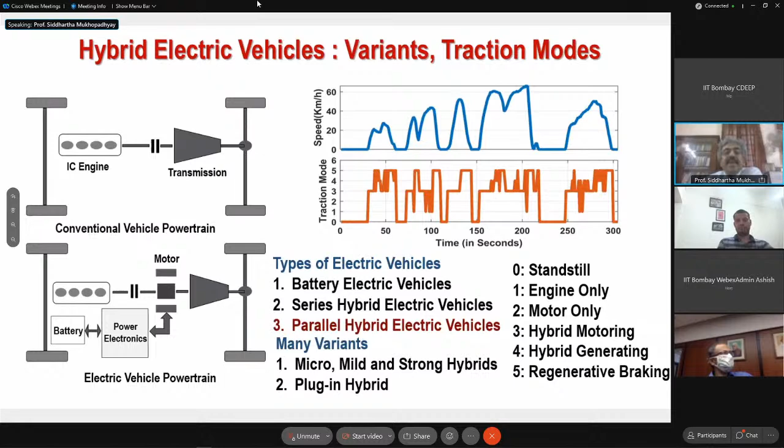If you have a vehicle with a gearbox, then you have 1 degree of freedom because you can choose the gear, and to some extent you can change the torque-speed operating point of the engine itself.

If you have a parallel hybrid, then your degree of freedom is 2, because you can choose the gear, and you can also choose, at any gear position, what is called the torque split ratio - how much torque at that gear you want from the engine and how much from the motor. That is in the hands of the optimizing algorithm, so it has 2 degrees of freedom.

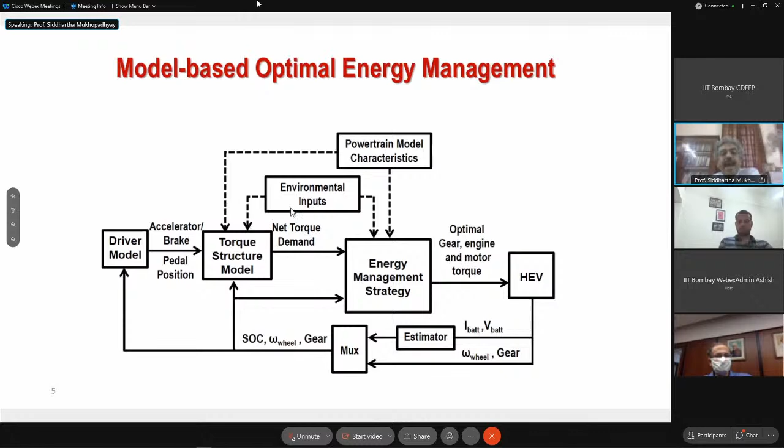But you have further choices. For example, we said the net torque demand has to be met, but the net torque demand itself depends on the aggressiveness of the driver, the traffic, the terrain, and of course the route. So there is a way of optimizing these things further to limit the mechanical energy required to get the vehicle from point A to point B.

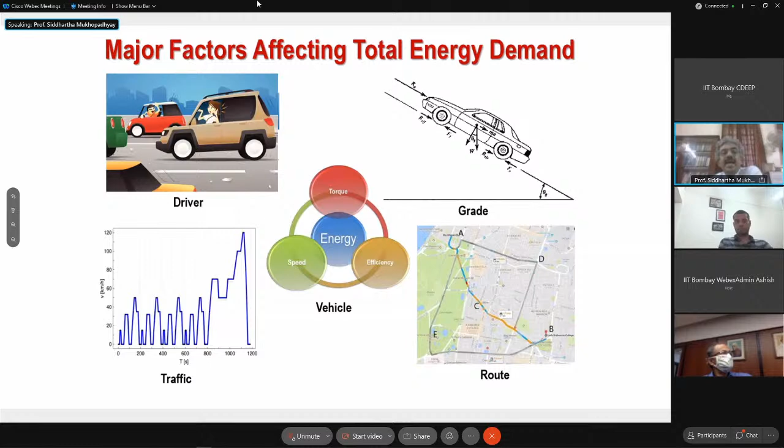If you really wanted to extract the maximum amount of energy efficiency from the overall system, it becomes apparent that you cannot stay in the car. The car - this was the low-level controller we just described, which basically takes signals from whatever is in the car. But you cannot stay in the car.

Because you need to know, if you want to really optimize for a trip, at what velocity and acceleration profiles you are going to move. You need to know what kind of charge replenishment you need to do to the battery, and various other stuff. So you need to aggregate and compute information from a lot of other sources and make a velocity forecast, and use a driver style. You can learn the behavior of the driver, know how the driver drives, know the health and condition of the battery, and what kind of demands will be placed on the battery for the whole route.

And then you have to use a high-level controller which will provide information with which the low-level controllers will work. So it turns out the energy management problem cannot be solved just by staying within the car - that is a very interesting observation. You need various kinds of infrastructure, cloud computing infrastructure, and various kinds of services to be able to give the customer the least cost of actually driving the vehicle. That's the key point I'm trying to make.

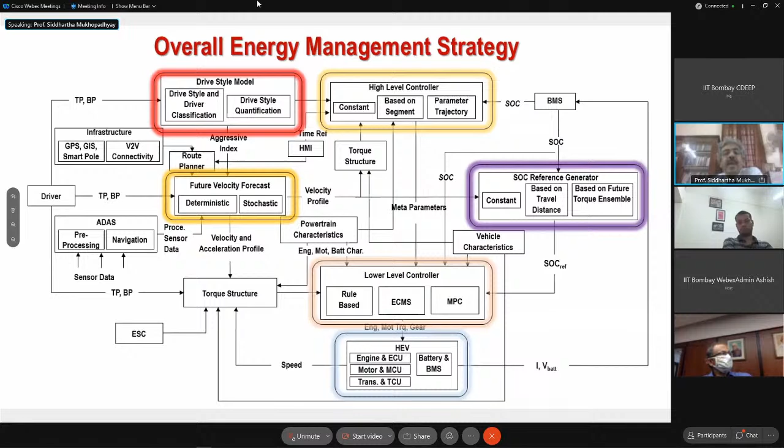So it turns out that the high-level controller has to, once you have specified a route, now we often travel with respect to maps. So when you travel the route, you need to segment the route. Across segments, you can make some assumptions about the traffic, the terrains maybe. So based on traffic, terrains, traffic lights, etc., you can make segments. And then you need to do a high-level optimization to actually decide the charge references which you need to provide to the low-level controller. That becomes very important, because there are some situations that will arise when you need both the engine and the motor to run.

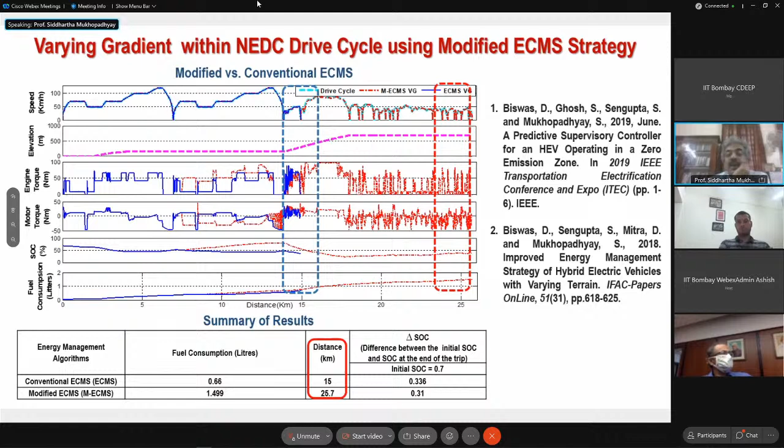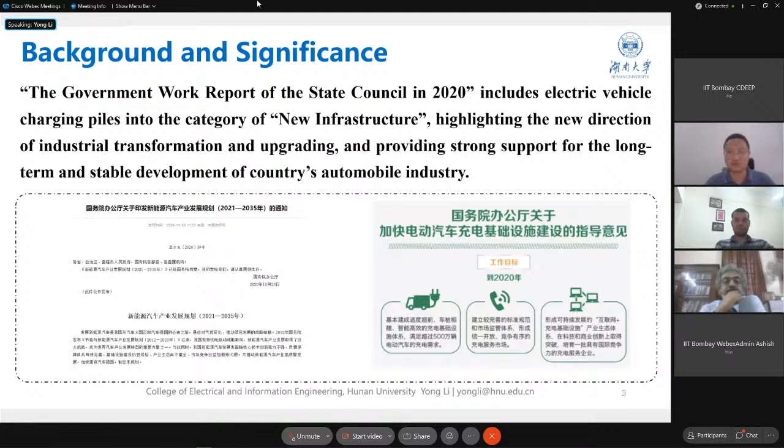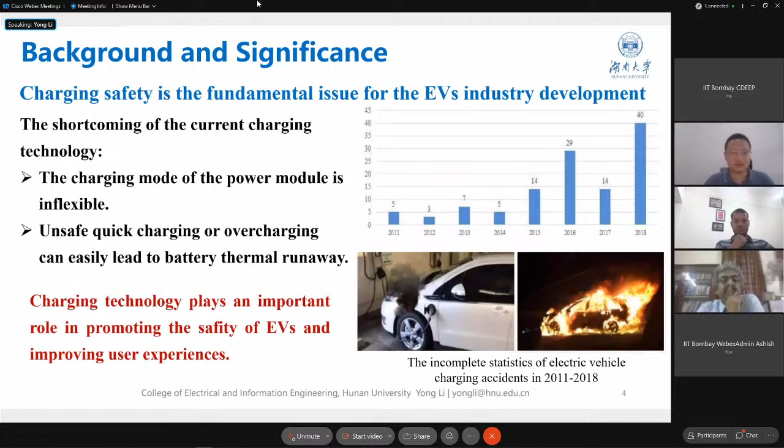Charging safety is a fundamental issue for electric vehicles. But current charging technologies have some limitations, such as the charging mode of the power module being inflexible, and unsafe quick charging or overcharging can easily lead to battery thermal runaway. So the charging technology plays an important role in promoting the safety of EVs and improving user experience.

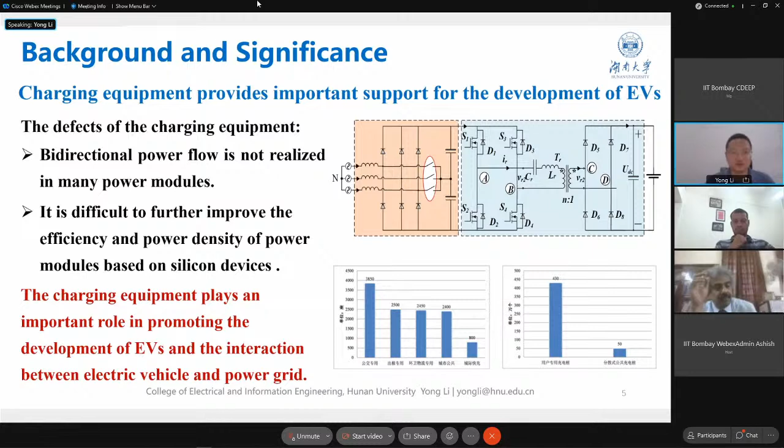However, for the charging equipment, there are some limitations. Bidirectional power flow is not realized in many power modules, and it's difficult to further improve the efficiency and power density of power modules based on silicon devices.

So, considering the mentioned background and significance, our team has performed research from 3 parts. The first is SOC estimation of the iron battery.

For the state of charge estimation, we proposed RNN combined with PSO to improve the accuracy of SOC estimation, with good generalization ability on driving cycle data sets at different temperatures.

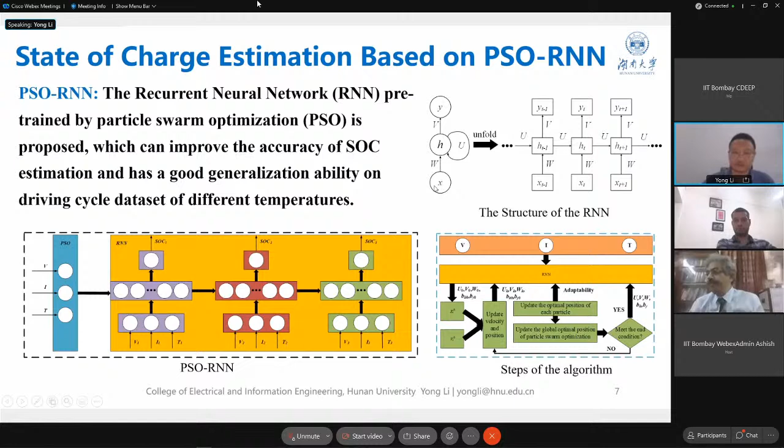This is the structure of the RNN and the PSO-RNN combination, and the flow chart of the algorithm. We did many experiments to validate our estimation algorithm and compared it with current data-driven methods.

The PSO-RNN method can reduce the error within 2%, and the SOC estimation of the proposed method is more robust and accurate. We can see the figures about the SOC error, and these figures indicate the performance of the algorithm.

We also tested our algorithm at different conditions, such as different temperatures and different data sets in different countries, in China and in the USA. In summary, the PSO-RNN method has good robustness at different temperatures.

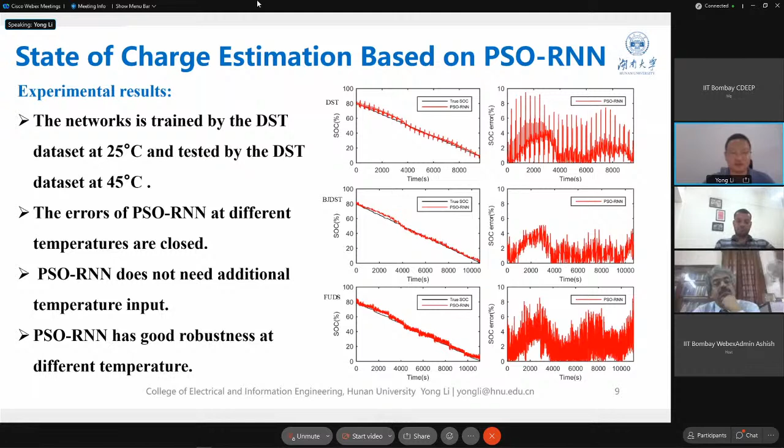The second part, I would like to introduce the charging strategy of lithium battery. Here we investigate the multi-stage constant current charging strategy. For this strategy, it can be segmented by the charging cutoff voltage. We first segment by cutoff voltage and the charging curves, which we can see in the figures here.

Compared to traditional CCCV charging profiles, the MSCC charging profile is more flexible. It can provide a flexible charging process to improve the charging performance.

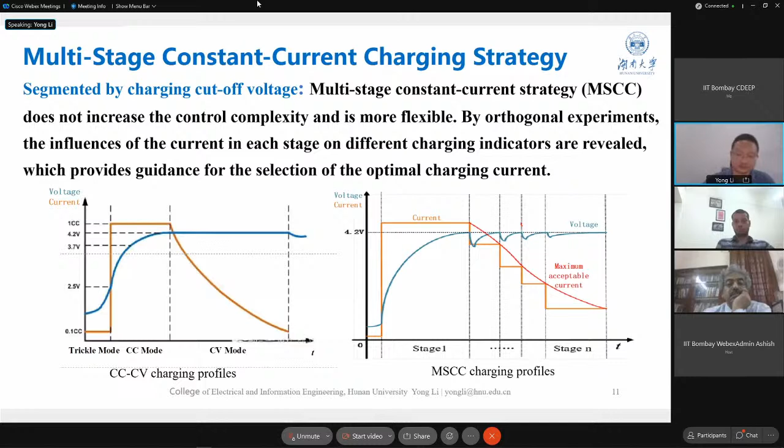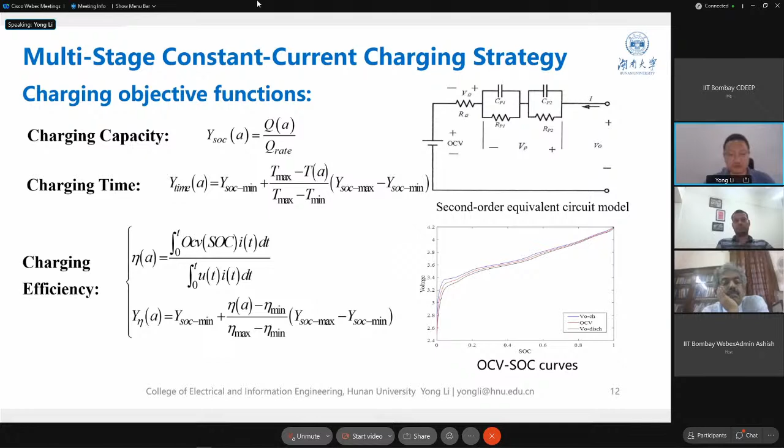We propose some metrics for the charging performance, such as evaluating the charging performance by charging capacity, charging time, and charging efficiency. For the charging current optimization, it's a multi-factor optimization problem for different objectives.

To address the optimization problem, we use the Taguchi method to solve the optimal charging current combination. This method is an experiment-based method, and the core of this method is the orthogonal array under the factor effect evaluation.

We can see from the table that the charging process is divided into 5 segments, and each current contains four levels. We can see the first step orthogonal experimental result, where the charging current in the fifth stage is weighted as a significant factor of the capacity and time.

The second level is the optimal value. The capacity and efficiency are maximized by the charging current in the first stage, where the first level is the optimal value. So here we optimize the charging current at different stages.

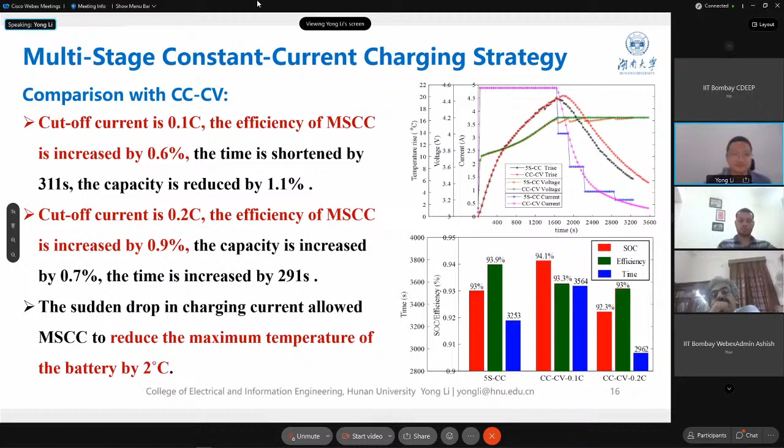Also, we compare the method with the existing CC-CV method.

This is the result. For the time limitation, I don't talk more about this. And this is another aspect to evaluate the charging performance of this strategy.

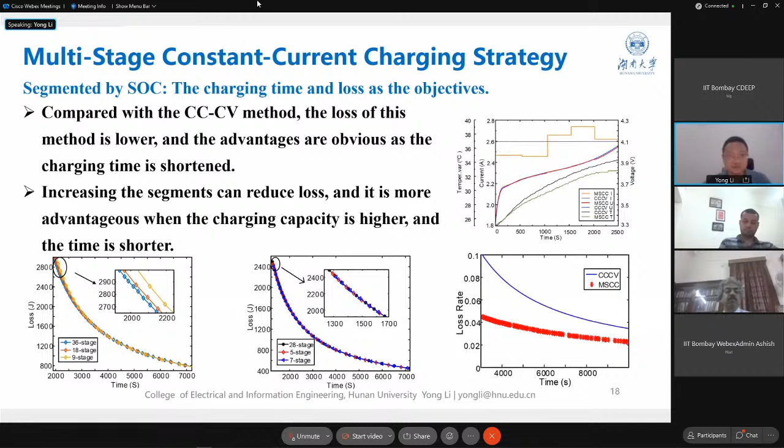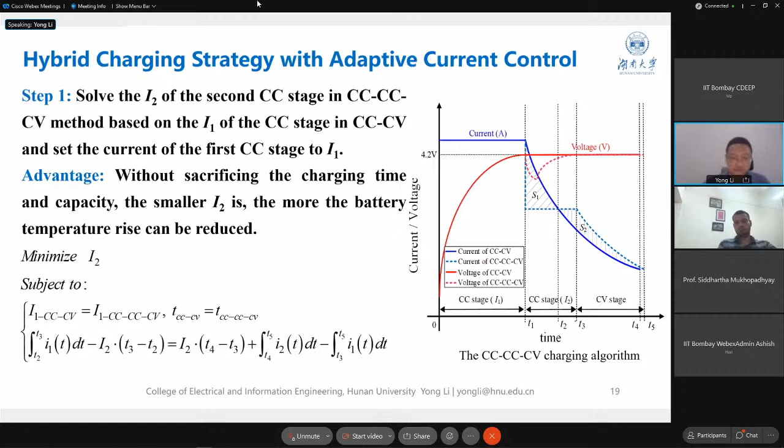For the second step, this is based on the internal resistance of the battery; the current of the first CC stage in the hybrid charging strategy is adaptively controlled. We also established models showing that the adaptive current can significantly reduce the charging loss and reduce the battery temperature rise.

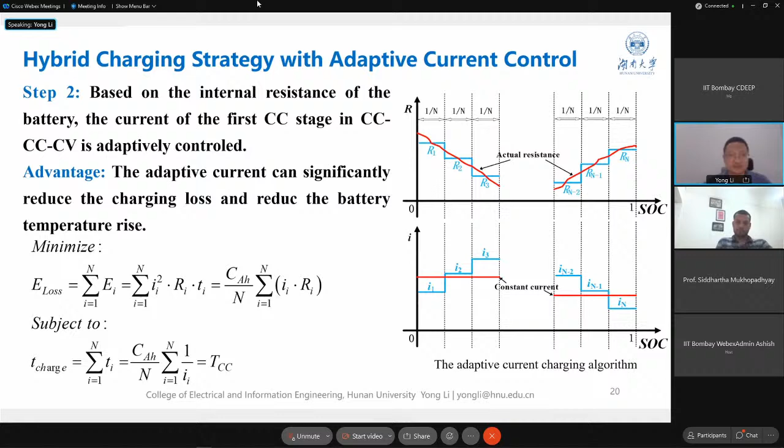Also for the hybrid charging strategy, we performed the HPPC test at different SOC to obtain the internal resistance and the impedance. This is the result.

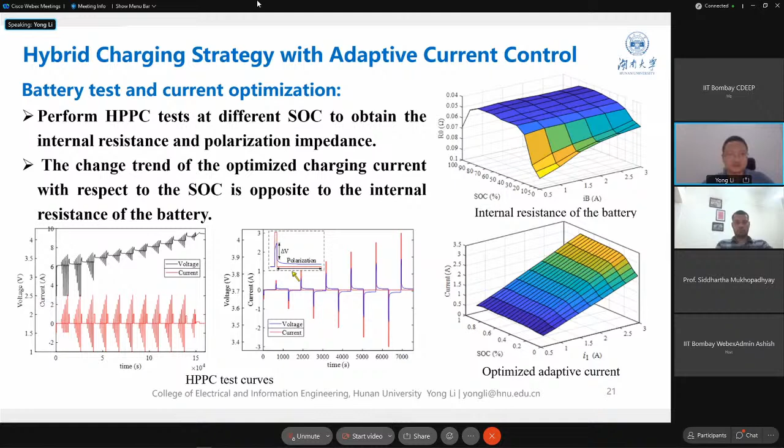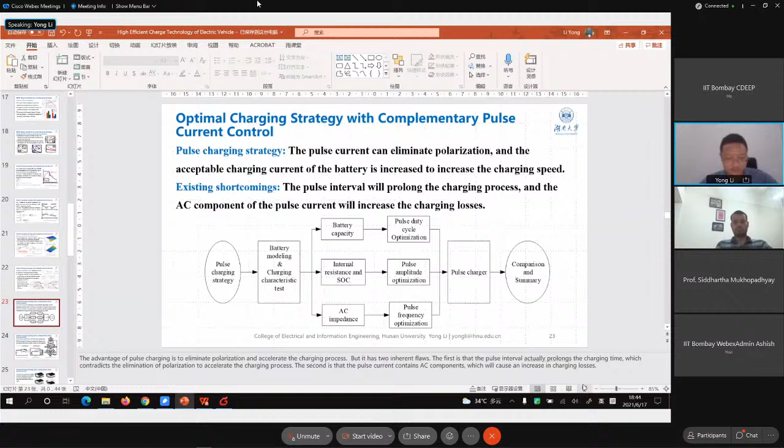optimal charging strategy with complementary pulse current control. When we study the optimal charging strategy, because for pulse charging, the advantage is to eliminate the polarization and accelerate the charging process. But it has two inherent flaws. The first is that

the pulse interval actually prolongs the charging time, which reduces the charging performance. And the second reason is that the pulse current contains an AC component, which will cause an increase in charging loss.

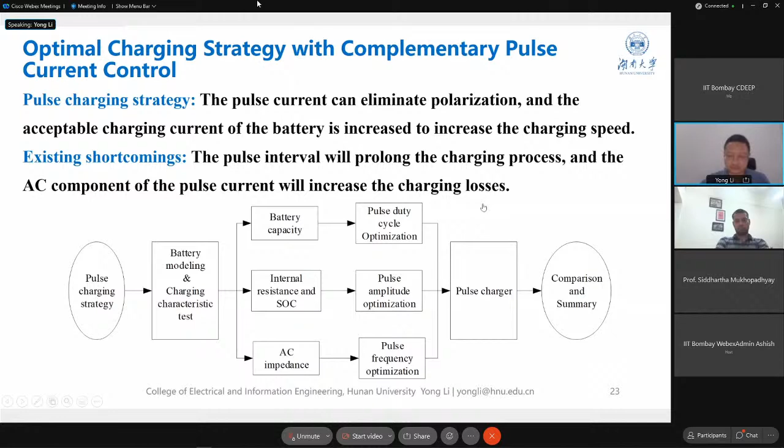So for the optimization of the pulse frequency, the minimal AC impedance frequency is obtained by the AC impedance spectrum test of the battery, which is used as the initial value. We also tried online tracking of the optimal frequency based on the perturbation observation method for frequency tracking here.

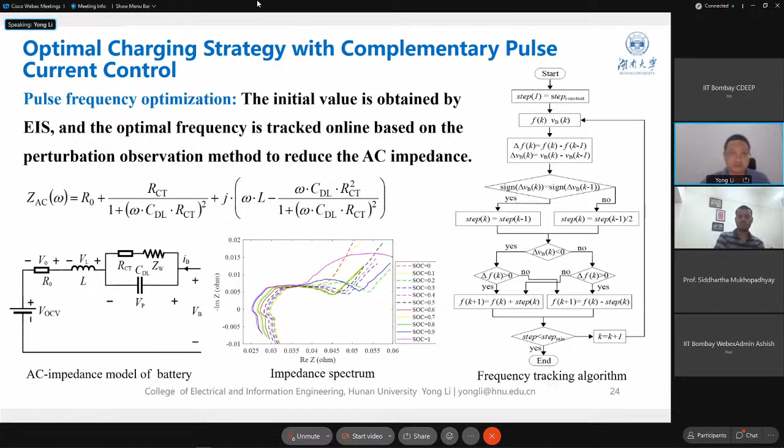For the method of pulse frequency optimization, it's the same as the mentioned hybrid charging strategy. Actually it's also based on the battery's internal resistance characteristics to optimize the charging current and minimize the charging losses.

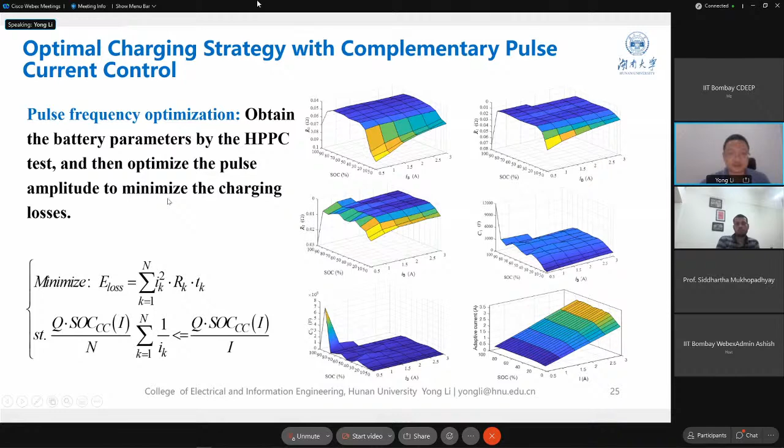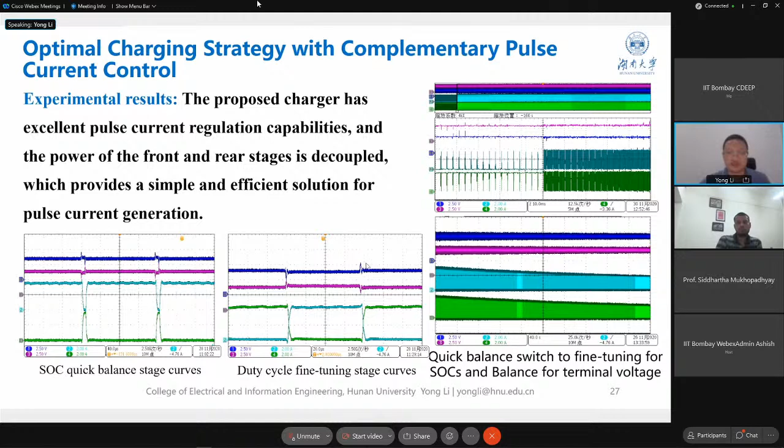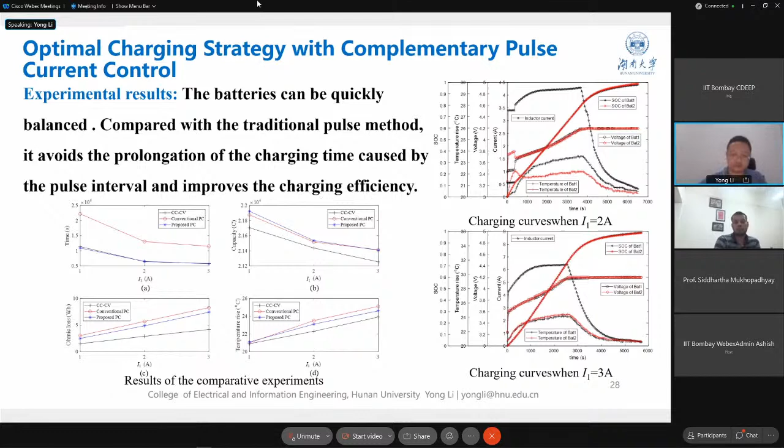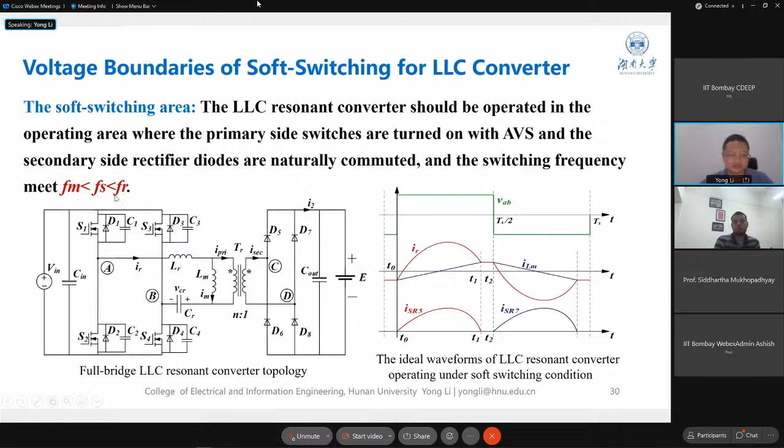And there are two soft switching boundaries of the LLC resonant converter. The ZVS upper voltage boundary corresponds to the maximum output voltage of the converter under the ZVS condition, when the circuit is in the series resonant state of the reactance here.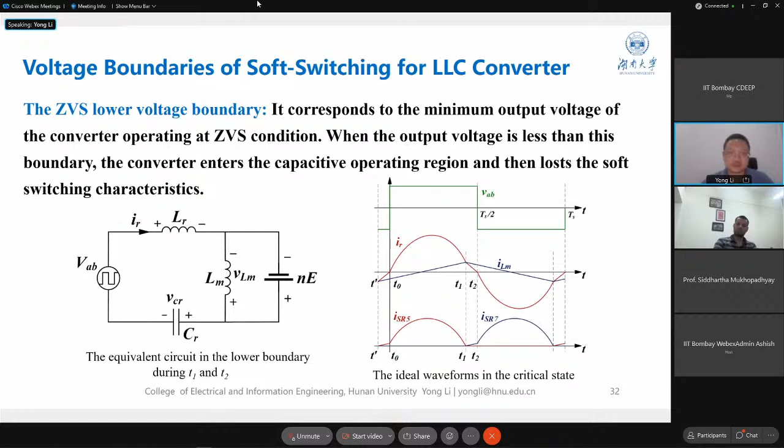In terms of the ZVS lower voltage boundary, it corresponds to the minimal output voltage of the converter under the ZVS condition. This is also the characteristics analysis about the boundary here.

Here we show the process of the calculation and the output voltage at the upper boundary and the lower boundary. We can do some calculation here. We also do the experiment to illustrate the upper and lower boundary for the LLC at the ZVS condition.

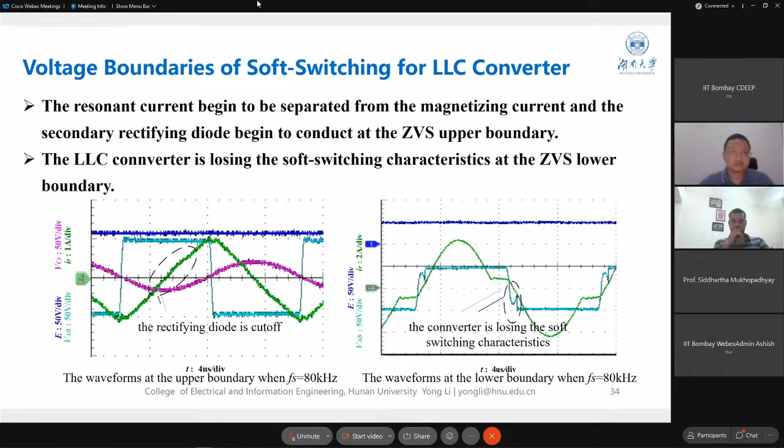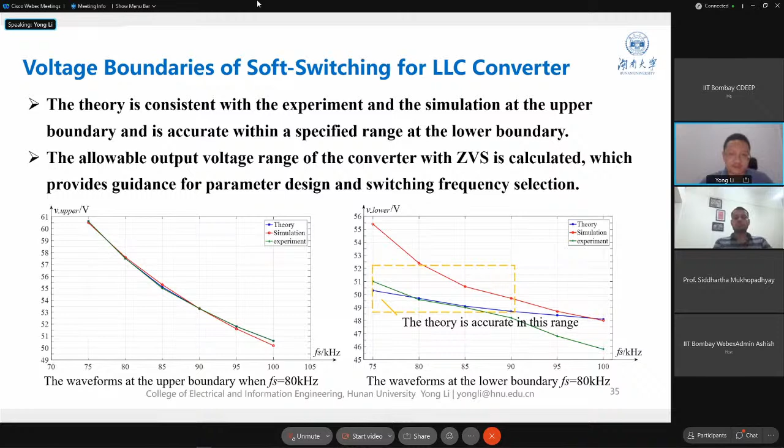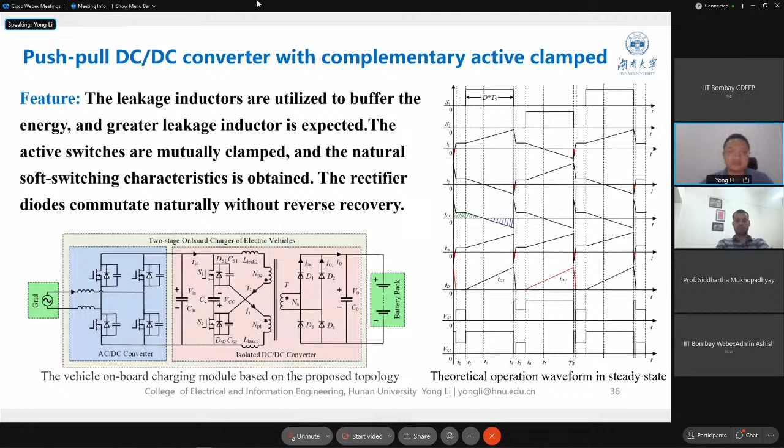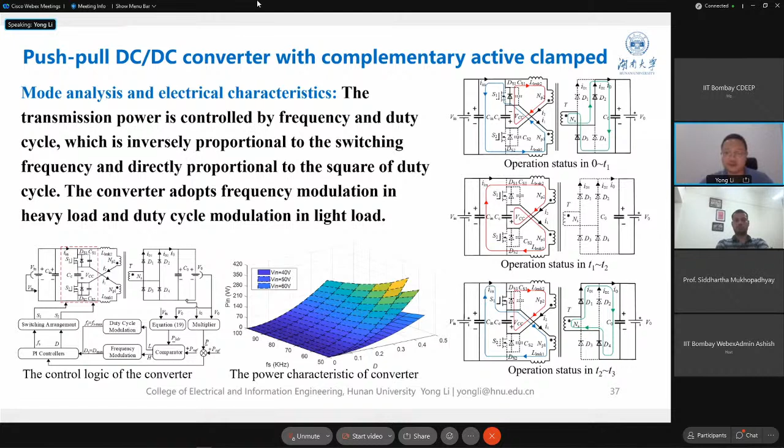So we also do some analysis about the experiment here. And at last, we propose a push-pull DC-DC converter with complementary active clamp to improve the charging performance of the DC charger. We analyze the operating mode for the DC-DC converter at different operating states, and also we obtain some experiment results about this.

In summary, supported by the Key Research and Development Program of Hunan Province, China, we established the platform for charging and discharging tests for lithium batteries. With this battery platform, we can develop battery state monitoring and also test battery parameters.

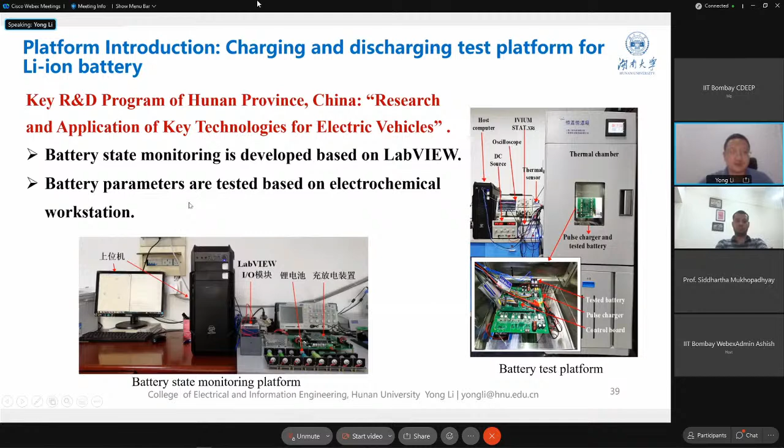We also established the charging module research and development and electrical vehicle charging platform. This is a platform for power electronics research and development. In Hunan University's campus, we established a demonstration charging station. Actually, this is a PV storage charging microgrid with smart building, used for this demonstration project.

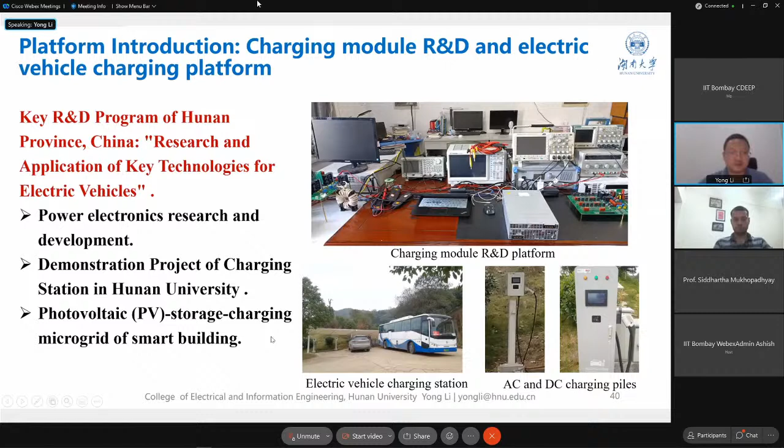For the conclusion, we focus on high efficiency charging technology for electric vehicles and carry out research in the fields of state of charge estimation, battery charging strategies, and charging converters. Various charging strategies are proposed and improved to increase charging flexibility and improve charging performance.

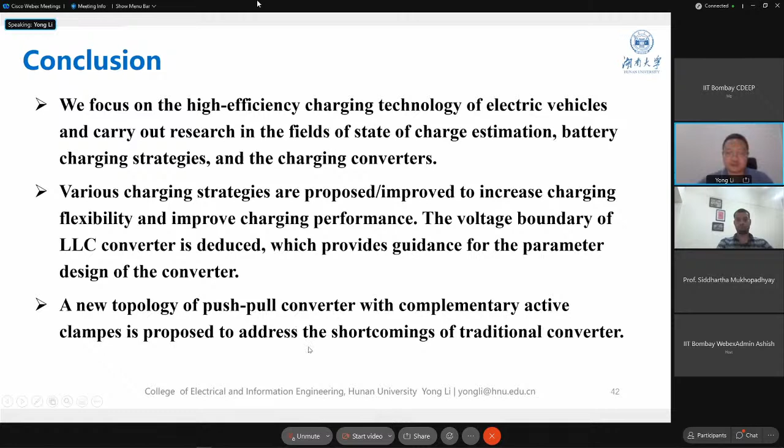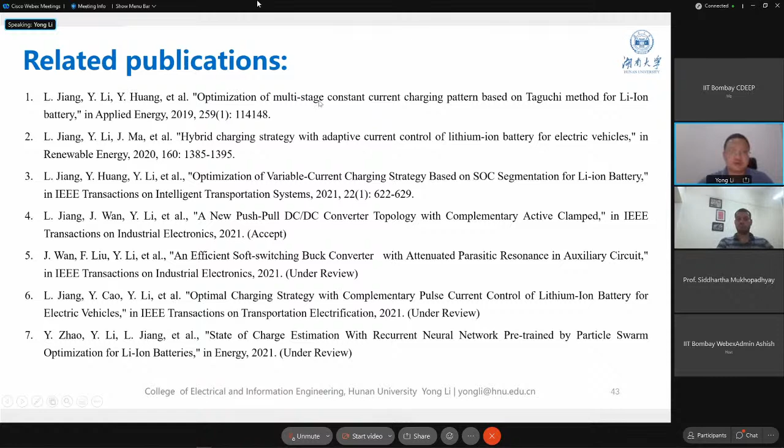We proposed a new topology of push-pull converter to address the shortcomings of traditional converters. This is related publications for the presentation. Okay, thank you for your attention.

So, any questions? Thank you, Professor Li. I think there is one question in the chat box, I'll read it for you: for SOC estimation, what kind of current profiles were used?

Okay, I will say here. For the SOC estimation, we use the dynamic stress test. We consider, actually this is a data-driven method, so we consider different temperatures, and also use the benchmark data set for the SOC data for this method, such as the driving cycle data set at different temperatures.

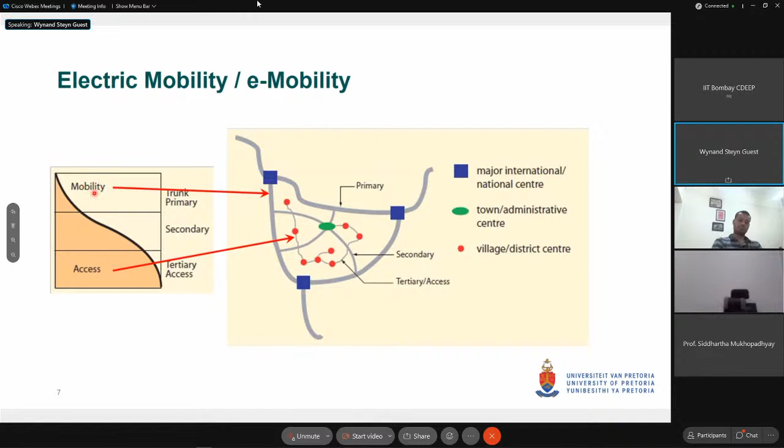Electric mobility or e-mobility is obviously focusing on the whole electric powertrain technologies, which a lot of focus is on. But very importantly, also in-vehicle information and communication technologies and connected infrastructure. These aspects, from a road pavement engineer viewpoint, are sometimes more important to focus on, because this is where we take these electric, hybrid, hydrogen fuel cell vehicles with very specific reasons, and we see how they connect to our infrastructure, or how we use data and information from them to support and improve the infrastructure we're working with.

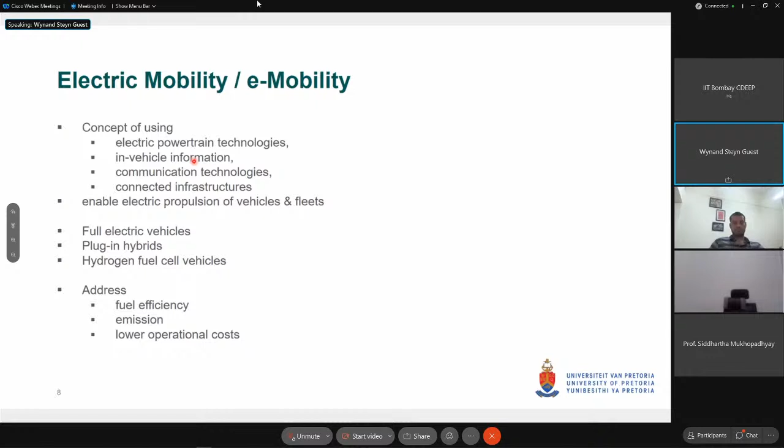Another aspect to think about is the digital divide, which indicates, in terms of the digital economy, where the gaps are in the world. Nielsen defined this as three stages: the economic part, where data is just too expensive; the usability part, where there's access to data but it's too complicated for the user; and then empowerment, an interesting one, where the available digital technologies are not used to their optimum. So too simple usage - you don't realize the power of the computer you've got, so you just do basic typing on it. Various types of digital divides that we've heard about.

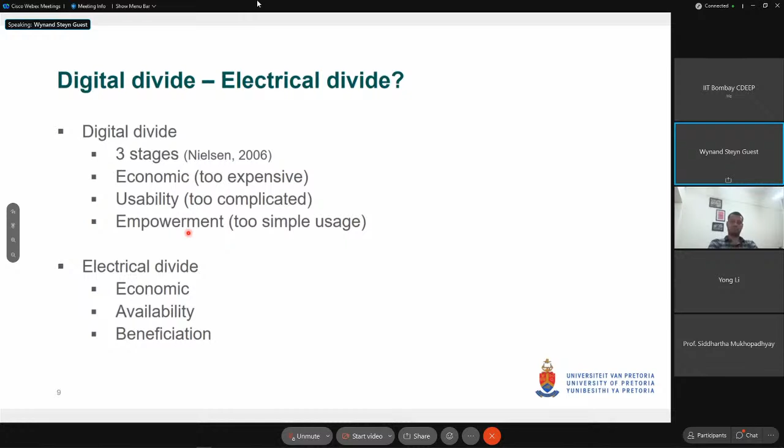But similar to this, we can also look at the electrical divide. The electrical divide partly looks at the economic part, where it's too expensive to obtain electricity; the availability part, where there's purely no electricity available; and then the beneficiation part - what do you do with this electricity when you've got it available? Are you only lighting a light? Charging a vehicle? Charging a cell phone? What is the beneficiation of this electricity? Because it's wonderful to have electricity, but if it's just in a wire and you don't use it to beneficiate and support the community, then it's really not of much use.

Now, I indicated in the title that the talk also has a bit of a transdisciplinary context. It's quite important for me, when we talk about something like e-mobility or e-transportation, that we also ask how does it affect communities, how does it affect the people who are using the transportation. So an example I'd like to share is transportation and food mobility.

E-transportation, e-mobility, and food mobility. A very important question is to look at where food is produced and where it is consumed, because between production and consumption, we need some kind of transportation. In terms of transdisciplinary research strategy, we cross disciplinary boundaries to enable a holistic approach, so that we don't provide e-transportation in an area where there's not electricity or not a need, or the need is different than what we think.

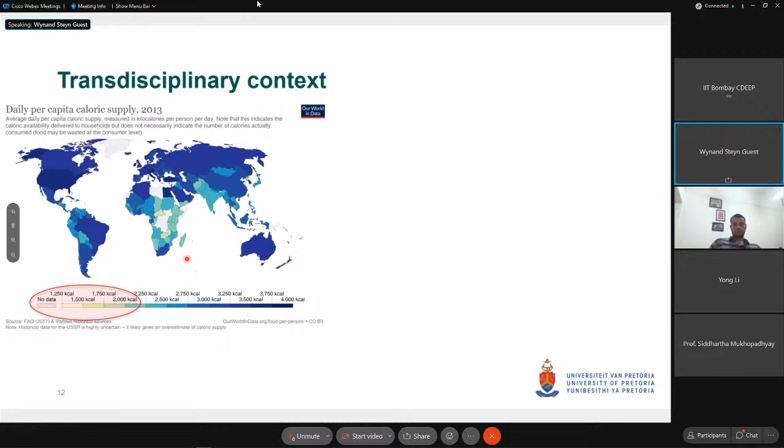So in this context, if we look at the daily per capita caloric supply in terms of food supply in the world, we can see from very low calories to very high calories, there are differences across the world. Food scientists tell us that an average person needs between 2,000 and 2,500 kilocalories per day, and we can see that there are many places in the world where there are shortages in the production of caloric supply.

But why do we need to look at food? If we look at the daily caloric supply of various countries and compare that to the gross domestic product of those countries, there is a positive relationship between them. There are many other aspects and factors I'm not including in the discussion now, but you don't need to be a major scientist to see there is a strong relationship between caloric supply and the GDP of a country, which obviously includes various other economic aspects.

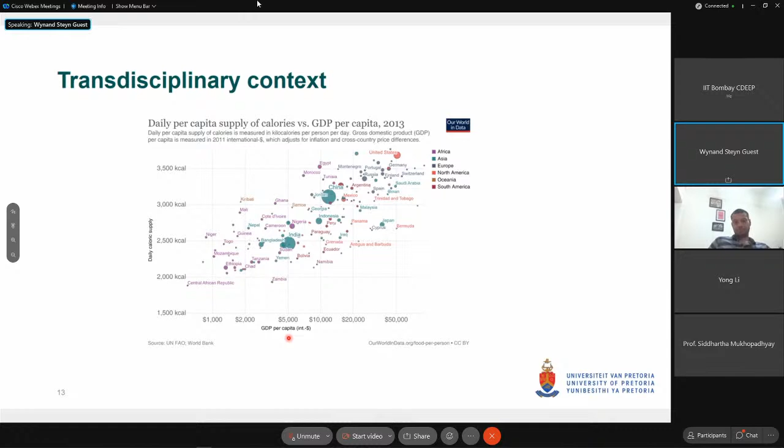So getting food, transporting it from the source to the point of use, is quite important. One example I'd like to highlight links to food transportation, e-transportation, and the bigger issue of electronic data from the whole transportation process. This is something we've done at our Engineering 4.0 facility for a number of years, and quite recently with the development of smart avocados and smart tomatoes - devices that collect data on the experience during transportation between the source and the market, focusing on the effect of the transportation system, accessibility, and mobility on food quality.

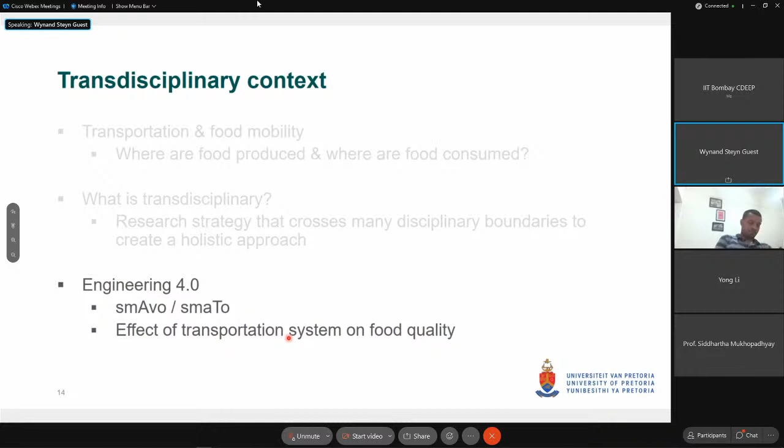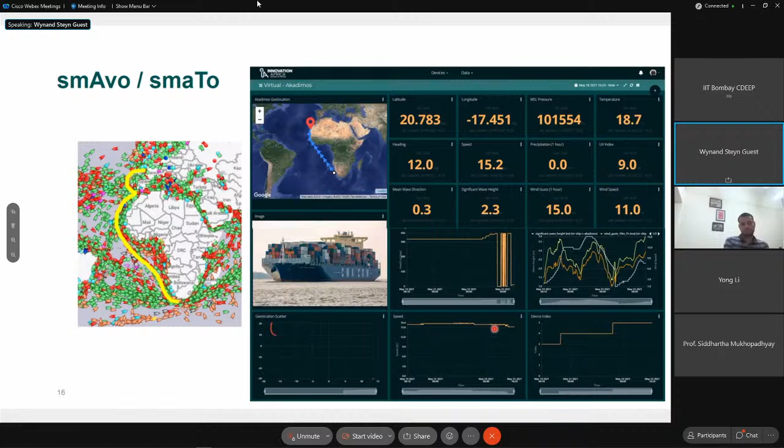This is the last part of that process, linking to international transportation, where some of those smart avocados were followed on a trip from Cape Town at the southern point of Africa - this was halfway through - all the way to Rotterdam in the Netherlands. The same idea applies in this big transportation picture, where a lot of food and supplies are being transported. Each of these little icons is a ship at that stage on the sea. What is the effect of transportation conditions on this transport? Are there aspects where we are losing quality, losing the benefit of the food, where the whole e-transportation system drops us?

The last focus for me is to look at the UN SDG links, our sustainable development goals. We all know about the 17 sustainable development goals, and some may be very appropriate to what we are doing in e-transportation, while others may not be as related. But if you match transportation with the sustainable development goals, you can see a major number of them, looking at hunger, poverty, clean energy, economic growth, infrastructure, communities, life on land, and so on, where there is a very strong link between transportation and sustainability. In my mind, the move towards e-transportation is quite important in this regard.

Then synthesis and way forward. I think e-mobility is a fact of life. We cannot get away from that. Electric vehicles have urban and rural applications, and changes in behavior are expected in this regard. We need to think about the issues around it, such as where to get the electricity, the E in e-mobility, how to distribute this electricity, and how to design for the E part, the electricity part, in our system. Should we change the design of our road networks, of our infrastructure, of our road furniture, or how do we cater for this in a bigger environment?

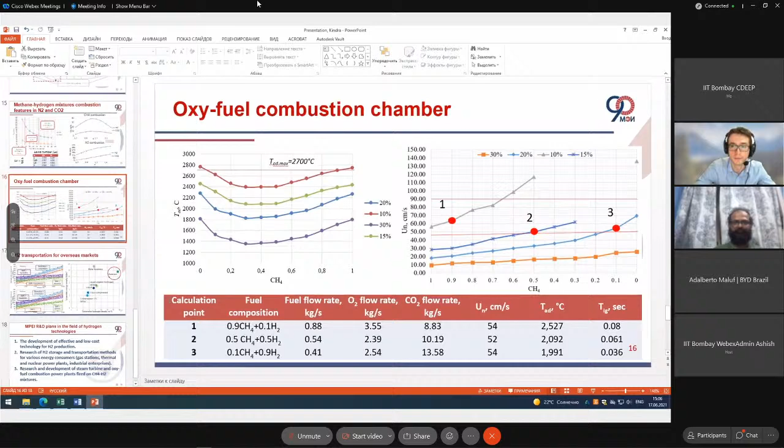The subject of my report will be the research and development of promising hydrogen technologies. Today, the hydrogen topic is very hot, and many countries are trying to find ways to develop new, perspective technologies in the energy and transportation sectors. My talk will have the following structure: I want to start with the relevance of the transition to a hydrogen economy in Russia, then give a brief description of the hydrogen concept.

After that, I want to talk about different power generation technologies, such as steam turbine power plants with hydrogen overheating, nuclear power plants with the same overheating, combined cycle gas turbines with hydrogen methane mixtures, and the last technology, oxy-fuel combustion power cycles with hydrogen methane mixtures.

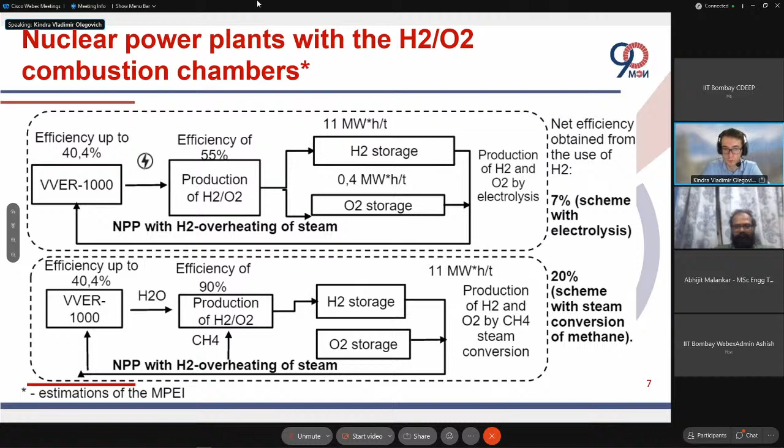This solution allows us to decrease investment for the thermal power plant because we could eliminate high consumption of heat-resistant alloys, which are used for boilers and steam pipelines, because the combustion chamber is usually located before the steam turbines and very close to it. So the efficiency of such a power plant would rise up to 45% if we have an initial steam temperature of 840 Celsius degrees.

However, there are some problems which could occur with that scheme, that technology. It's connected with the efficiency of the combustion process in such combustion chambers, because the pressure is very high and there's a lot of dilutant, steam dilutant, which also affects the combustion process.

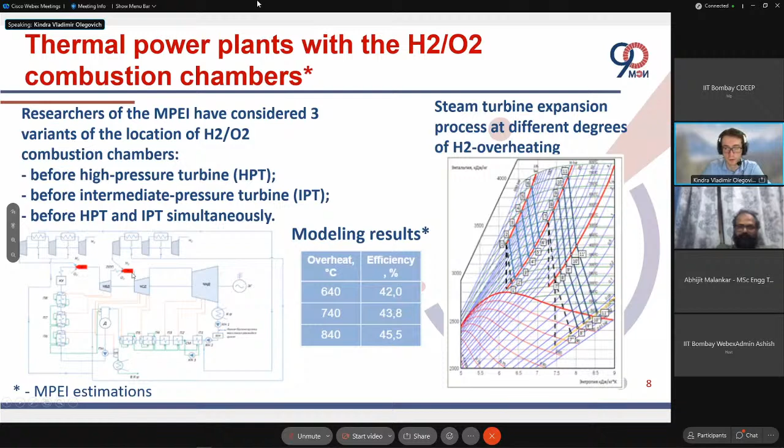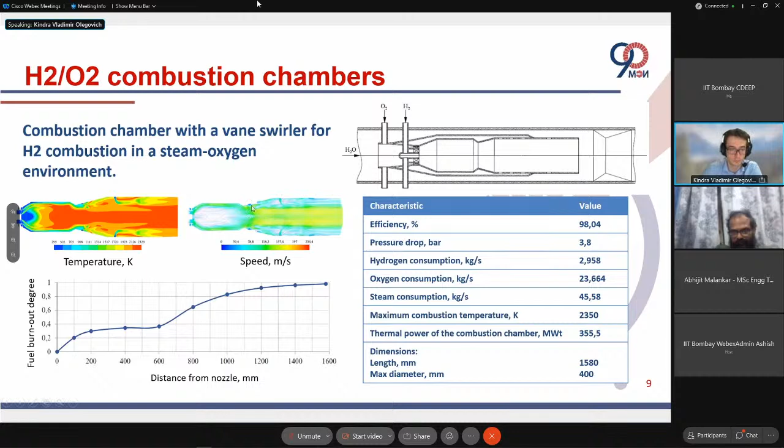The efficiency of such a combustion chamber is not very high, it's only 98%, so 2% of hydrogen will not burn. It's still a problem for us, and the reason is that we should burn hydrogen in near stoichiometric proportion of fuel and oxidizer.

The second problem we considered was increasing flow capacity in the low pressure turbine. To increase the flow capacity of the biggest part of the steam turbine, we could use the traditional method of increasing blade length, but we are limited because of strength problems.

The possible way to deal with it is creation of a two-tier low-pressure turbine with a special penultimate stage which has a blade with a fork shape. It's very unusual, and this blade was created at Moscow Power Engineering Institute. Such a low-pressure turbine would have the same blade length as a traditional one, but capacity would be increased by 40%, which is quite significant and could solve the problem of increasing flow in the low-pressure turbine.

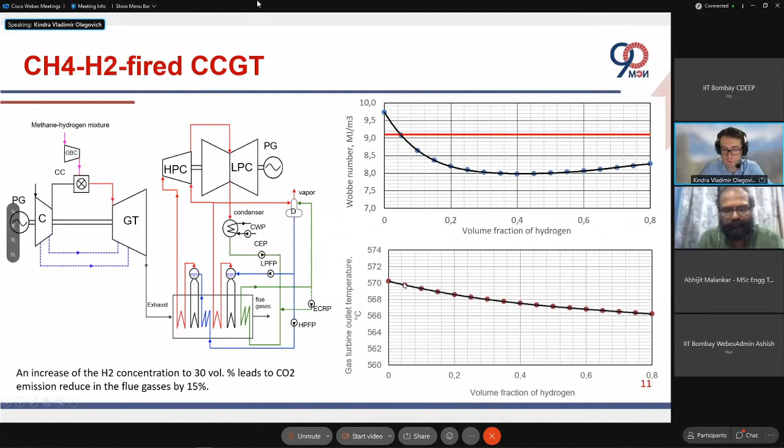The second technology we considered is the usage of methane-hydrogen mixtures in combined cycle gas turbine power plants. When we mix hydrogen with methane, we change the parameters in the cycle. The gas turbine outlet temperature will not decrease significantly, and efficiency also will not decrease significantly. Power will decrease by 1%, but efficiency will not. The reason is the increased content of water steam in the flue gases.

We also investigated the process of combustion, the results of which I'll show later. The last technology for electricity production, and one of the most promising, is oxy-fuel.

We also added a unit for ammonia production. Ammonia is necessary for transportation of hydrogen - it's a very cheap way for transportation of hydrogen over big distances. This unit is integrated using nitrogen produced by the air separation unit. Here you can see this link. After production, we could also transport some ammonia, and some hydrogen would be burned in the oxy combustion chamber.

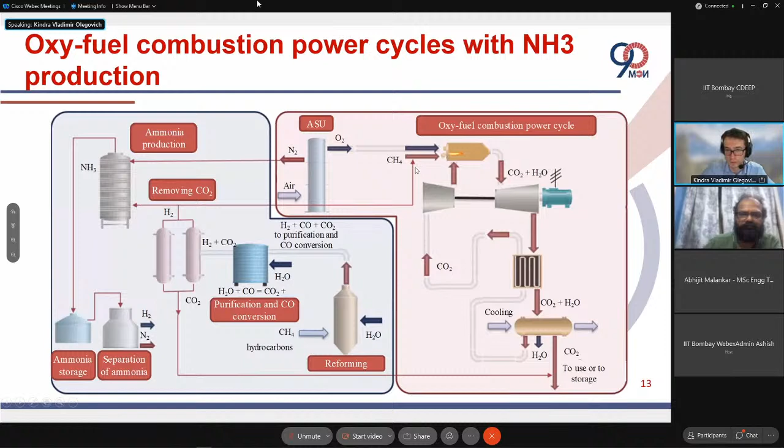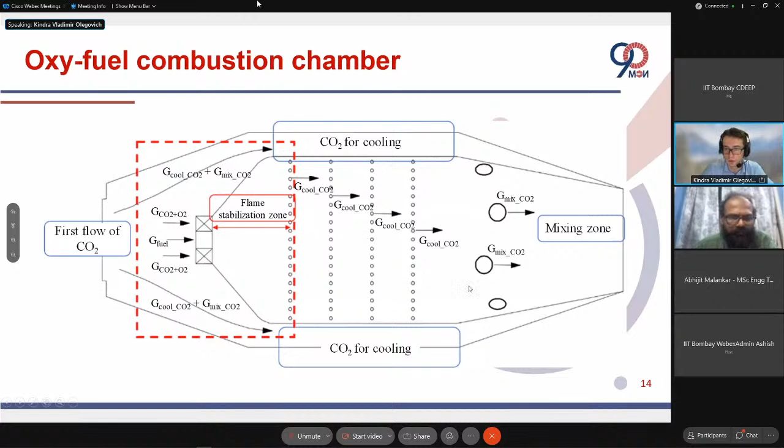Here on the slide you can see this kind of combustion chamber which could be used for oxy-fuel combustion. It has several zones: flame stabilization zone, cooling zone, and mixing zone. It's quite traditional, but the results of investigation are not very traditional for that combustion chamber.

When we model the oxy-fuel combustion, we found that it's well known that hydrogen has a high flame propagation speed, but the carbon dioxide, which is the diluent in oxy-fuel combustion, reduces significantly the speed of propagation. If we compare combustion in nitrogen-diluted versus carbon dioxide-diluted conditions, the propagation speed of hydrogen will be much lower in the carbon dioxide.

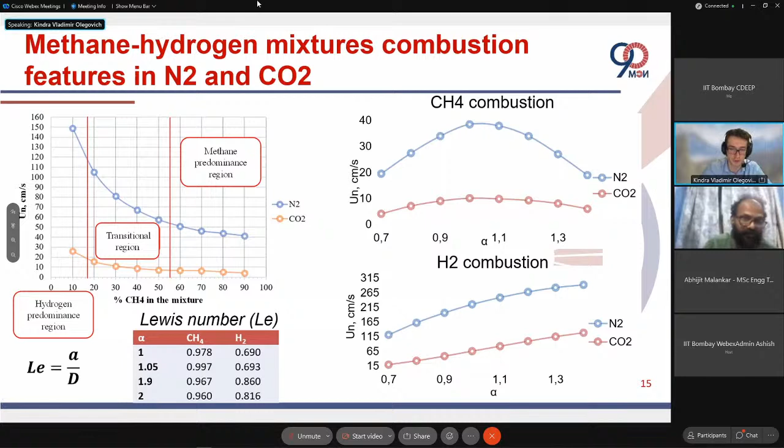However, hydrogen has a bigger flame propagation. So if we compare oxy-fuel combustion chambers with traditional gas turbine combustion chambers, this flame propagation will be near the same.

After considering the technology for hydrogen production and usage, we also wanted to investigate the possible ways of transportation. We considered well-known ways like compression of hydrogen, liquefaction of hydrogen, and also the ammonia method. We found that if the distance is higher than 2,500 or 3,000 kilometers, the ammonia way of transportation is the cheapest.

It's one of the cheapest ways. Also, the storage of hydrogen in ammonia is quite competitive compared to others. That's why we use this method in the oxy-fuel combustion power cycle.

In the end, I want to say that in the future, Moscow Power Engineering Institute plans to increase our investigation in the field of hydrogen technologies. We have already created a new institution for hydrogen investigation. I've shown you only a small part of the results we have already achieved.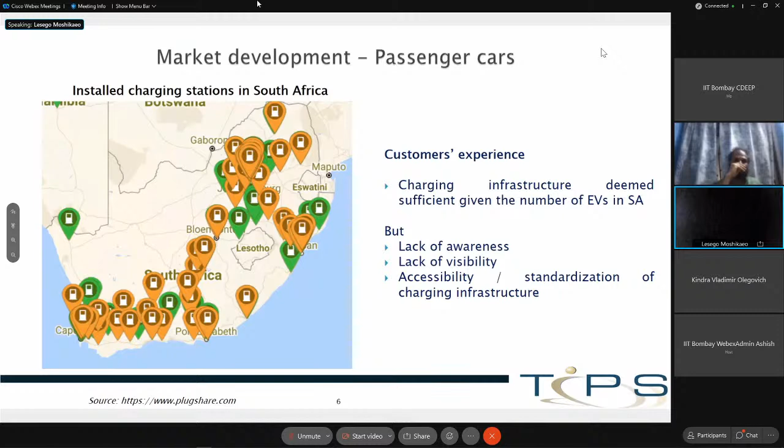But in South Africa we also have issues of blackouts and electricity prices increasing. When it comes to developing electric vehicles in the country, those are concerns, because if you buy electric vehicles and there are blackouts, it'll be very difficult for people to want to partake in this revolution—if you buy an electric vehicle, it'll be very difficult to actually charge the vehicle as a result of the blackouts we have in the country. So those are very valid and key concerns that most potential customers have with regards to passenger cars.

So in terms of policy, we've identified four key areas for primary intervention. The first option would be for the country to change its value-added tax, or ad valorem, and we see this as being impactful. However, the question would be how do we justify it, because in essence it would seem as if we are subsidizing the rich, which could be very difficult to justify, since we're talking about luxury vehicles.

Especially in the case of South Africa, because we don't really have cheap electric vehicles like your China, for example. The second option would be to look at custom duties and provide a level playing field that addresses an anomaly we have in South Africa: importing full battery electric vehicles from Europe attracts an 18% import tariff, whereas BEVs from any other country attract a 25% tariff. So we see this as very important for policy, to level that playing field and address the anomaly.

But also there's no guarantee of reduced prices for customers if that was to happen. Another option would be preferential finance, done by partnering with financial institutions and hopefully providing cheaper credit for households. But again, the problem is that could be regressive, because it could be seen as providing cheap credit for rich income households, which would again be difficult to justify in a very unequal society like South Africa.

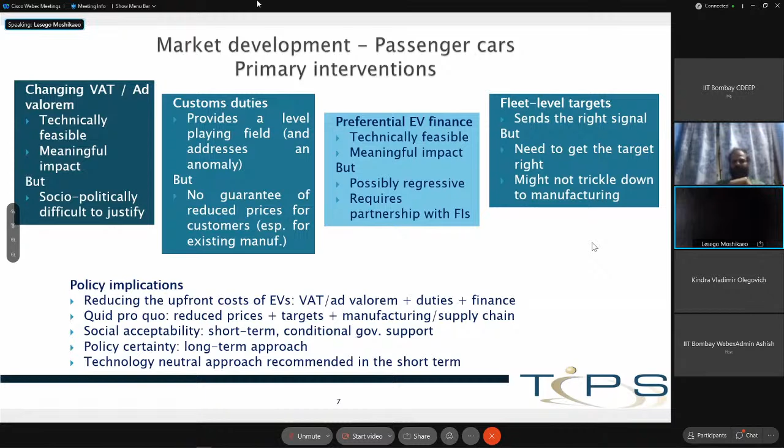As an addition to the primary interventions I spoke about, we also have what we call complementary additions that go with them. These are not beneficial by themselves, but they are complementary. So in order to reduce the price differential gap between EVs and ICE vehicles, we could look at things like reducing license costs for EVs, having preferential insurance rates, or increasing or offering free parking for EVs.

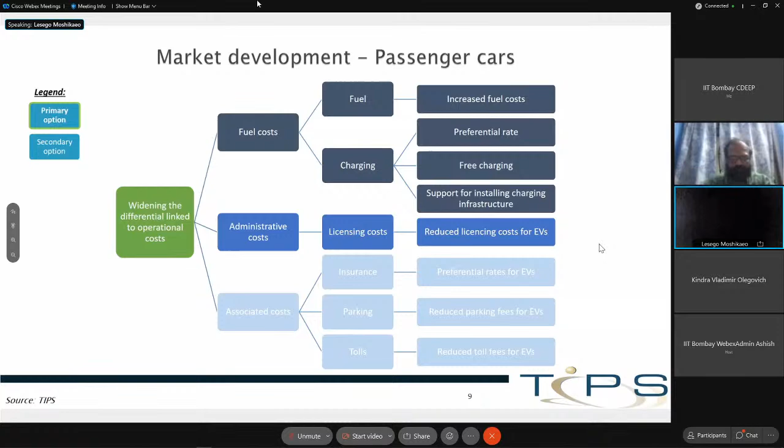And also we have non-financial incentives as well. In terms of market development, we've identified that public transport is very important to look at, and this is where we see the most impact in terms of EV rollout, because in South Africa public transportation is very important—almost over 50% of households use it. So when one speaks about e-mobility, inclusive development, and the just transition, we see it as very important for the rollout of e-mobility to prioritize public transportation.

Similar to the passenger market, we've identified a couple of interventions for boosting public transportation in South Africa. Again, that will be changing the value-added tax, but in this case it will be a lot more justifiable, because now you're targeting low-income households, so the impact is much larger.

Another option in South Africa is that we have this program called the Taxi Recapitalization Program, which supports the introduction of minibus taxis. That could be used to leverage this existing program in order to introduce electric minibus taxis in the country.

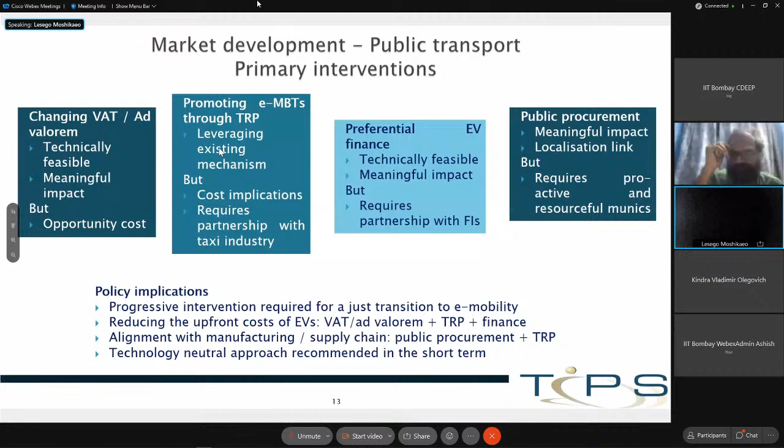So again, in terms of market development for public transport, we have these primary interventions, but we also have what we call complementary interventions or measures. For public transport, we could look at, for example, fuel costs and charging—providing either free charging or preferential rates when it comes to charging.

And then we looked at industrial development as well. In terms of industrial development, we looked at vehicle manufacturing and also, as previously mentioned, supplier development, which is more about components of cars. When it comes to vehicle manufacturing, South Africa is a big player in the global automotive value chain, ranked 22nd in the world in terms of production.

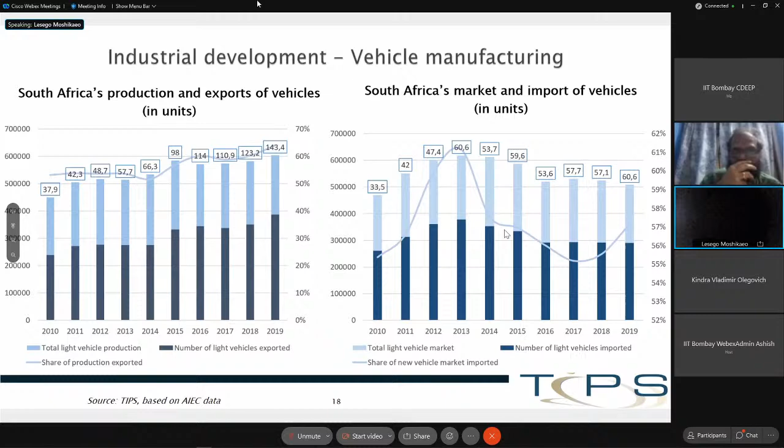You find that over 50% of South African vehicle production is exported, mostly to Europe and the US. So in order for the country to remain competitive and not lose out on its key markets, it's important for South Africa to move towards this e-mobility revolution and towards manufacturing—for the government to provide policy support for manufacturing electric vehicles, which is something we currently don't have in place.

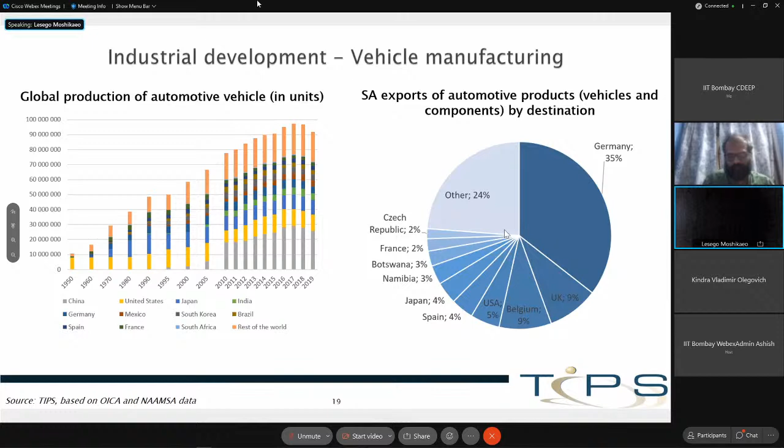In terms of developments when it comes to vehicle manufacturing in the country, there are a lot of conversions happening, especially in public transport with regards to buses and also minibus taxis. There are also developments around buses, with BYD and the City of Cape Town forming a partnership to develop e-buses in Cape Town.

But then you also find that the only OEM in the country is Mercedes, and they're manufacturing plug-in hybrids. But these are manufactured exclusively for the export market because there is not much local demand for such vehicles, so most of them are exported.

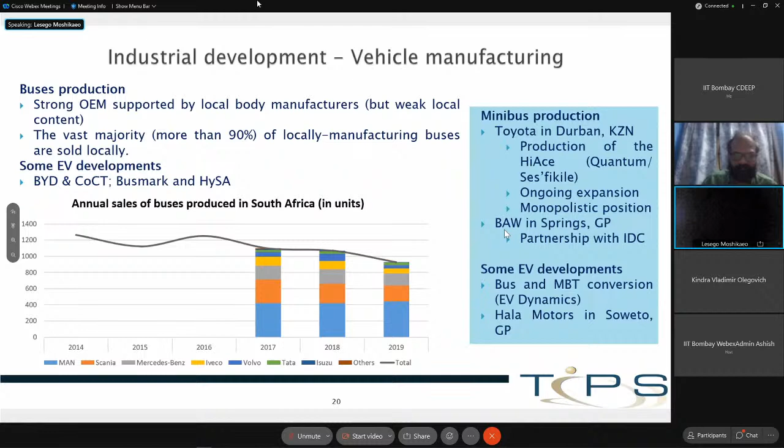So when it comes to primary interventions for vehicle manufacturing, we've identified three options. The first option would be a very straightforward one, and that is to use our automotive policy in South Africa, called APDP. That would be a policy used to try and support OEMs and give them incentives to stimulate manufacturing in the country.

Another option would also be fleet level targets, and again we believe this would really send the right signal to the market. But then the downside is that it might not actually trickle down to manufacturing.

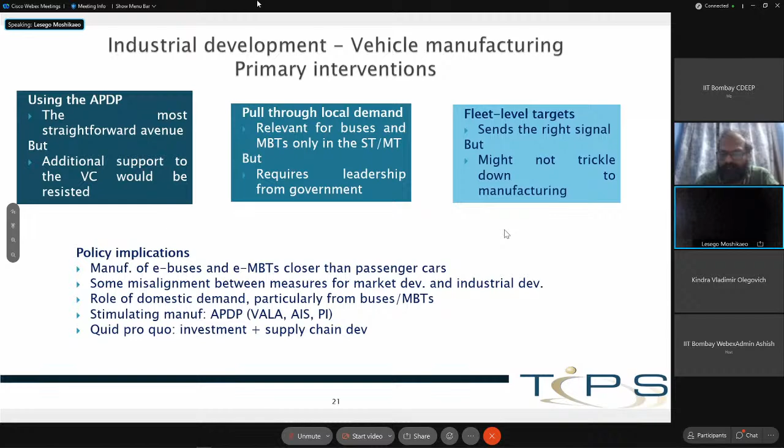We also have developing the supply chain, which is very important, especially in the South African context, because this includes component suppliers, mostly SMMEs, mostly Black owned, and mostly in tier 2 and tier 3 levels. These are important because these suppliers are often able to unlock employment opportunities, which is again very important to South Africa.

So when we look at the value chain for EVs and ICE, we see a lot of overlaps, but there are also components that are EV specific, and we see South Africa as playing a role in that. But it's also important for us as a country to identify where we can actually have a competitive advantage.

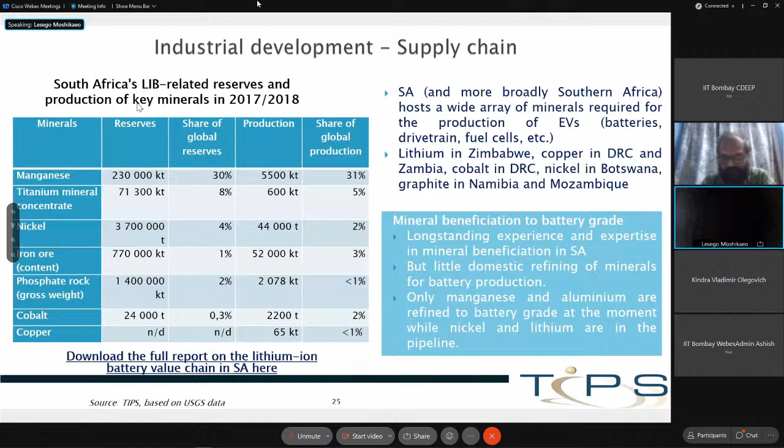And we've identified that we can have a competitive advantage mostly in lithium-ion battery manufacturing, because we do have some lithium-ion battery-related reserves, and some are broadly available in Southern Africa as well, such as lithium in Zimbabwe, and copper in Zambia and the DRC. In South Africa, when it comes to mineral beneficiation, there has been beneficiation to battery grade, where South African companies are actually beneficiating lithium-ion battery minerals to battery grade, and this includes manganese and aluminium as well.

This speaks to why it's important for South Africa to move towards manufacturing EVs and EV components, because currently our top components are very ICE specific, such as catalytic converters and engine parts. These are going to Germany and the US, markets that are rapidly moving away from ICE, and they've implemented policy saying that in a couple of years they will ban ICE vehicles. So South Africa is at threat of not being competitive.

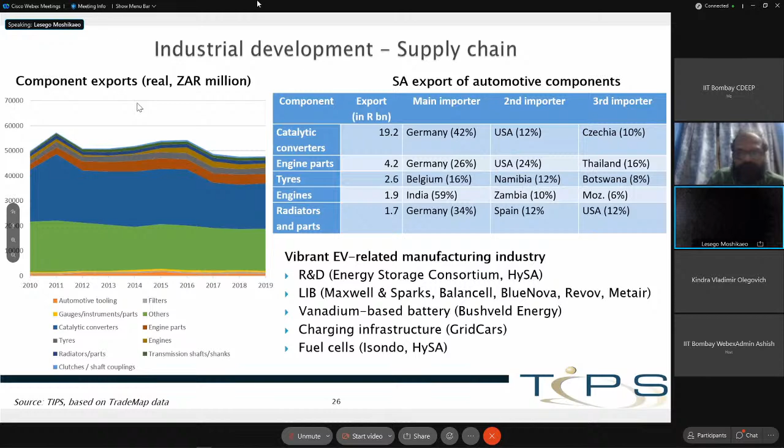That's why it's very important for us to move towards manufacturing electric components. There are companies in the country in lithium-ion battery assembly and manufacturing. We also have companies in charging infrastructure, and a company called Isondo that is also looking at manufacturing fuel cells. So again, we have primary interventions to look at, including modifying the APDP, the automotive policy.

We also have mineral beneficiation, which could be very important, because then we could look at import and export tax, or developmental pricing, which would make the minerals much cheaper for local manufacturers.

But then I think it's also important to consider that the availability of raw materials in South Africa and in the region, although they provide a basis for value chain development and a comparative advantage to South Africa, it is not necessarily a competitive advantage if we don't have the investment, the R&D, the skills development, and the market access. So those are very important to think about as well.

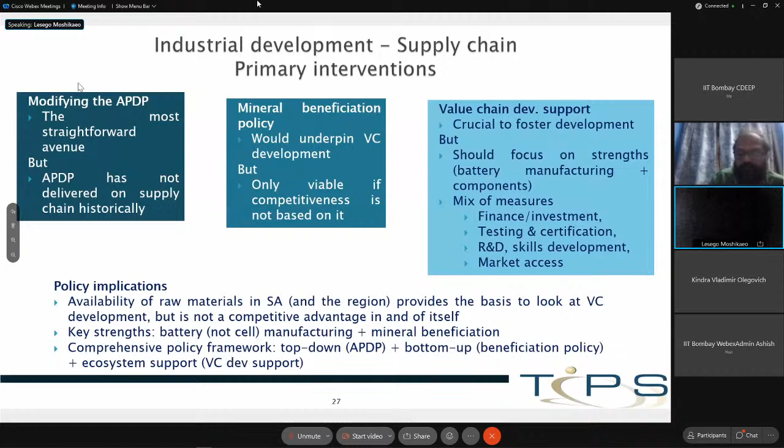And then just going to conclude quickly.

So when it comes to policy, we see the development of e-mobility as a multifaceted endeavor. We think it's important for the country to craft a policy framework aimed at fostering the sector, and we're aware this requires considering multiple angles. However, it's important for the government to send a strong signal to OEMs to kickstart the development of EVs in the country, because this is a very important industry in South Africa, and we can't afford to be left behind given all the investment in this industry, in terms of employment, investment, and SMME support as well. I'll stop there.

Thank you, Ms. Moshikaeo. Very insightful presentation on industrial development, particularly for electric vehicles. You really dealt with supply chain, length and breadth of it, and also touched upon the heterogeneous geographies across South Africa. You tried to articulate a perspective for small and medium enterprises as well, which is the core part of the whole supply chain. I think our friends would articulate their questions in the chat box.